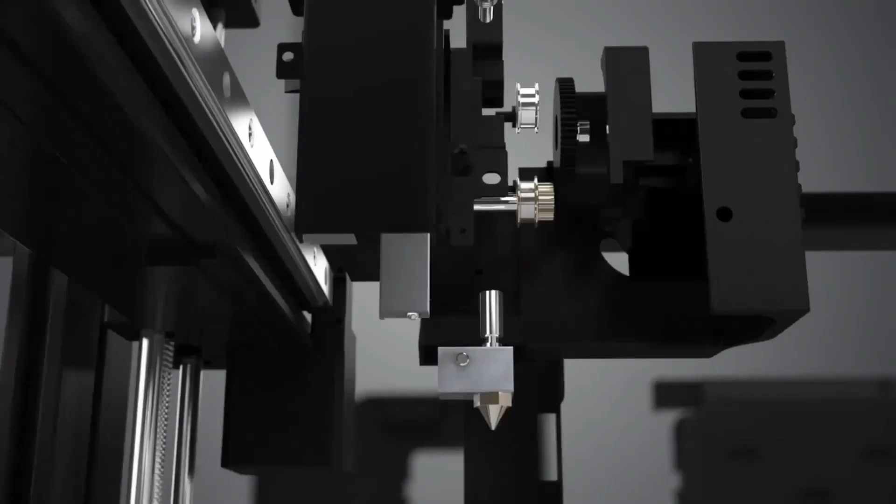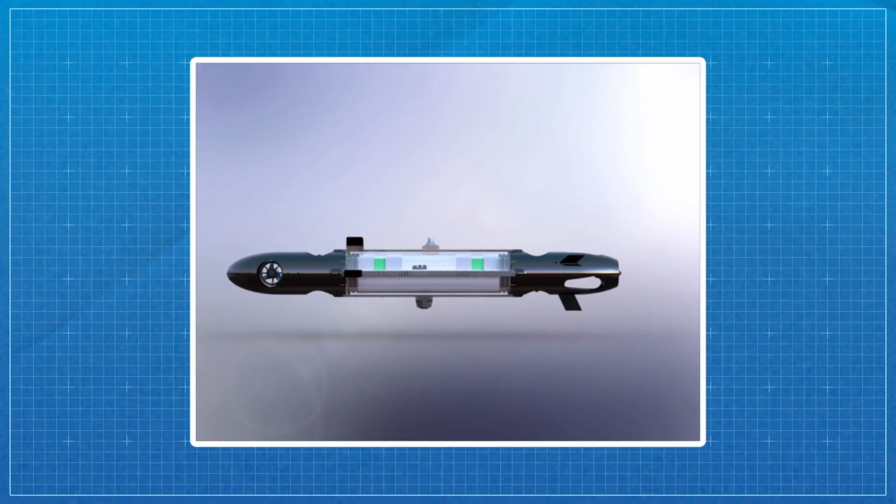Can you go ahead and just let me know what's up with Yonder Deep and what you've been up to? Yeah, sure. So, like I said, my name is Daniel. I'm the current president of Yonder Deep. We're currently a student organization at UC San Diego, also based out of Scripps Institute of Oceanography. We're working towards developing a 3D printed autonomous underwater vehicle, or AUV, primarily for oceanographic research.

And with this goal in mind, we're working in collaboration with a physical oceanographer, Grant Deane, at Scripps Institute of Oceanography, to develop our AUV for deployment in Svalbard, Norway this summer for climate change research, which is really exciting. We'll be collecting acoustic data, which directly tells us how fast a glacier is melting and ultimately translates into the rate of global warming. So that's been our project the past few years, and we recently partnered with Raise3D, and we're excited to work more with them.

We actually partnered with the oceanographer Grant Deane about 5 years ago, and we've been working on the same project for about 5 years. He's really been focused on climate change research. A big thing for him, with a background in glacier research, is that getting up close to the terminus of a glacier is really dangerous when you have 200-foot tall calving events happening. You obviously don't want to be underneath that. So for him, gathering acoustic data at that level is really important.

Getting that data requires an AUV, and that's transformed how the entire research community has been gathering this data. But the problem is these AUVs can range from tens of thousands of dollars to hundreds of thousands, even millions, depending on the capability. So we're really here to change that, make entry-level research more accessible. And that's where we are today.

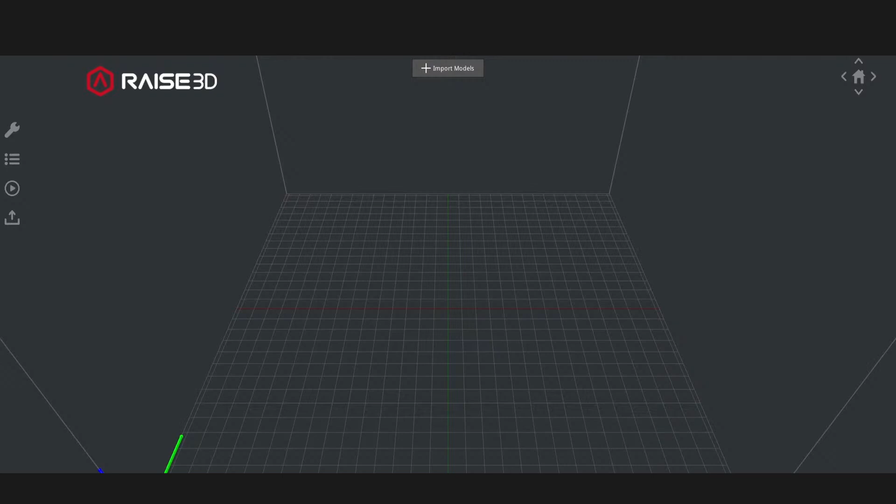Yeah, actually, I do have some of your parts here. Do you want to take a look at them in ideaMaker and go through what it would be like to print them for your guys' application? Sure. Sweet. Okay, cool. Which file do we want to bring in? I think the nose cone or the front motor end cap, either of those could be good. Okay, both excellent choices. I'm going to go with the front motor end cap. Be a little bit quicker.

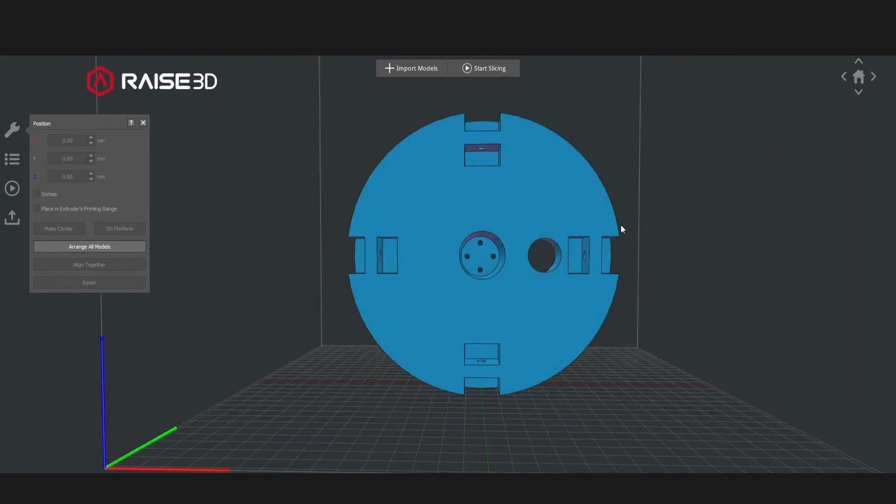Real quick, this just goes to show the type of parts we're working with, and CNC machining this out of a piece of aluminum would be really difficult. Yeah. And also be pretty heavy. So that's why I opted for 3D printing. But anyways, with something like this, we really just place it on the flat face you see here. Yep. On the left side here. Then go ahead and just lay flat, or the 90-degree rotation snap. Either one will work. We're basically running it like this.

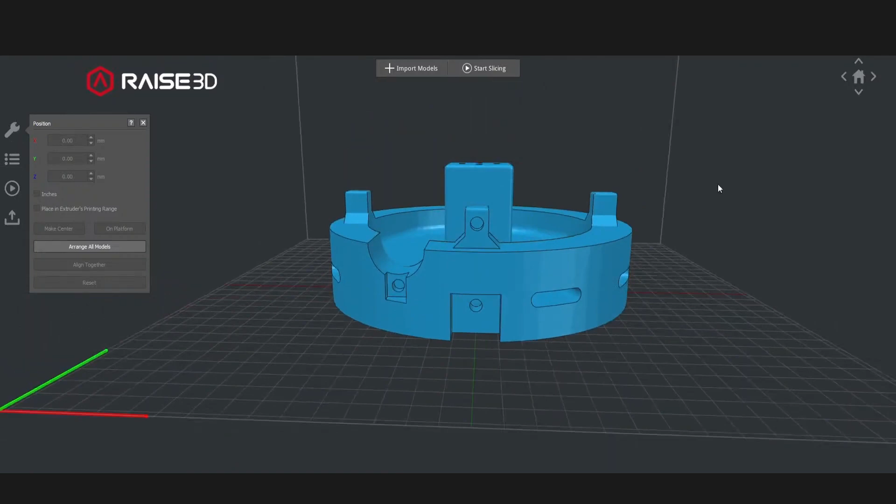Yeah, so I guess this part's relatively simple in its design. I think for our final version, we might put PVA into some of those little slots on the side. Those are for cable pass-throughs. Really, this part isn't too complicated, but this is a good example of one of the complex geometries we'd use that really wouldn't be possible without 3D printing. A lot of the things in here, like going around the outer end, could be CNC machinable, not too bad, but like we said, the weight considerations, and these cable pass-throughs.

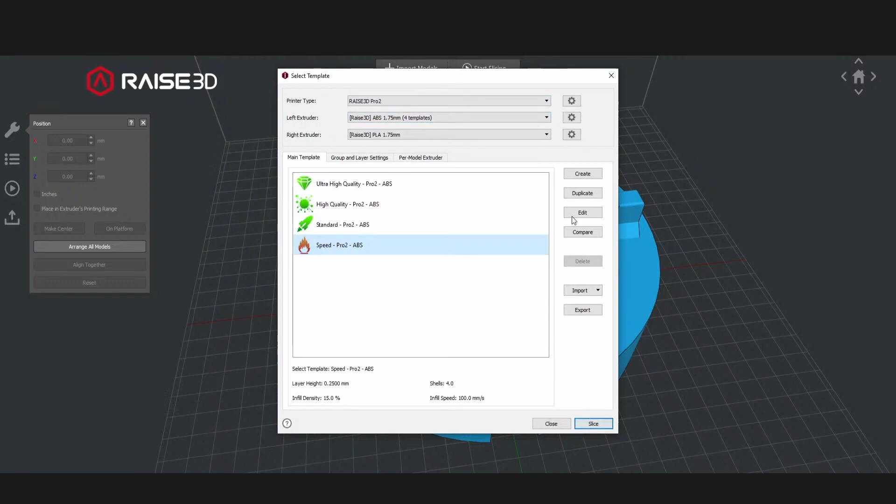I'm assuming this one isn't actually on the exterior of the vehicle, right? Is this internal? Yeah, most of this is internal. The slots feed from the outside, but it's mostly internal. So if it's mostly internal, if we were to do this out of aluminum, it'd still be pretty lightweight, but by printing it, we can get it down to, here, I'll just slice it really quick for ABS, just the part itself. If we're running it with our default settings, 15% grid infill, good for you? Yeah. All right, cool. And I'm leaving the supports off of this one specifically, just to get a read on the part material.

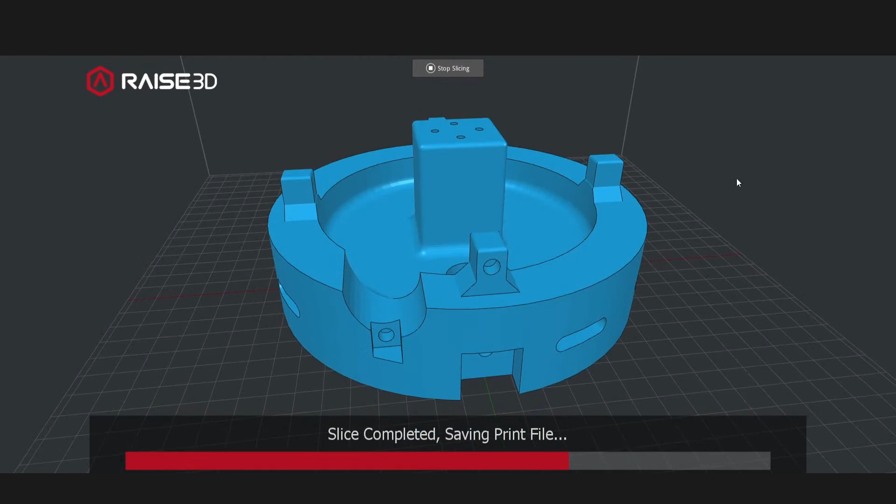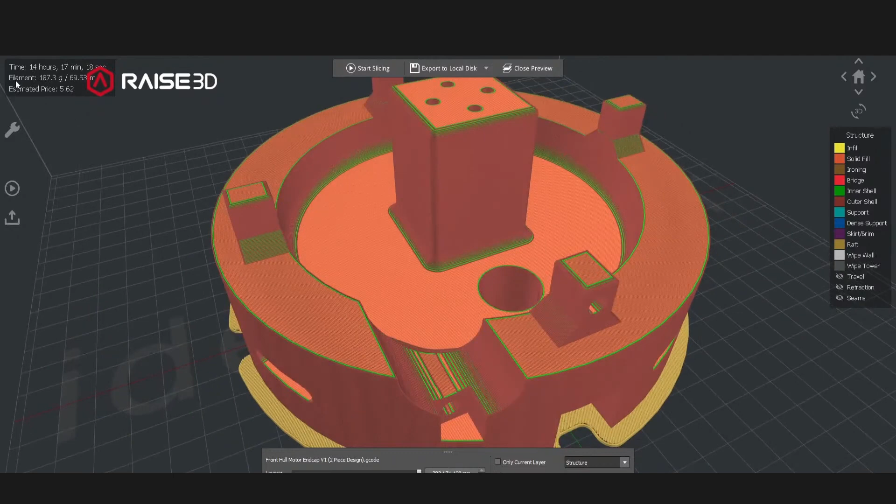So having the slicer give you estimates on things like that, I'm not needing to go through and look at what's the total volume of the part, what's the density of aluminum. It's basically part of the printing process to get that information. Okay, we're looking at 187 grams. And all of this would still be structurally sound enough for just holding those components, not taking any water pressure. Even if it was, that outer treatment just needs to keep that water out. The internal structure could still probably not be 100% density because we're compensating for the sealing of the parts with a different combination.

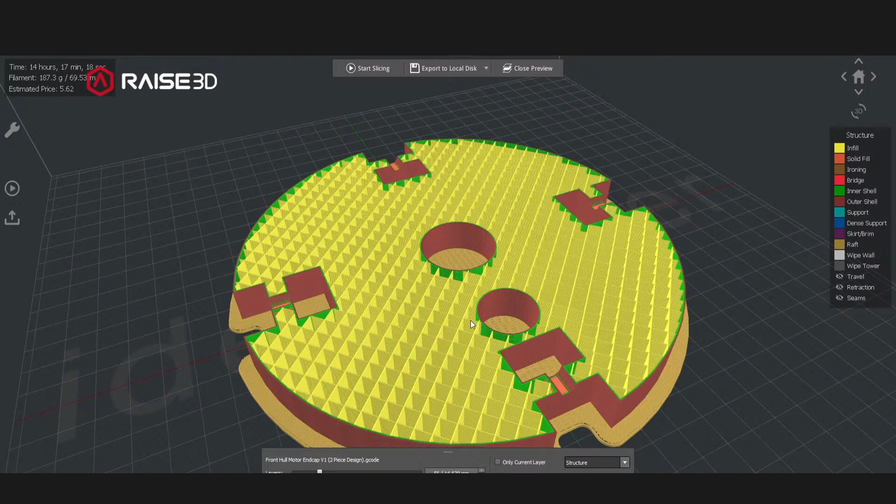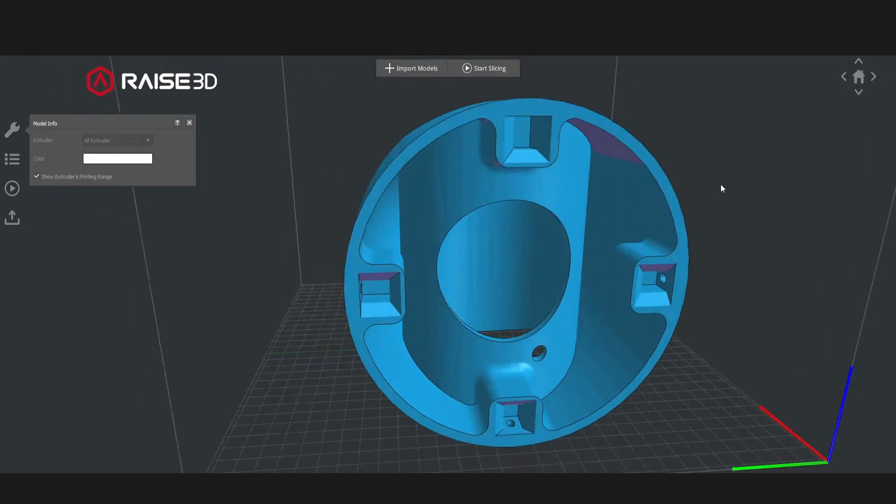And then I wanted to take a quick look at the nose cone. I might not reslice this one, but walk me through the purposes of this part and what you would be thinking about manufacturing by printing versus traditionally. Yeah, so this part is really difficult. I think it was meant to be 3D printed, like this big gap in here. So there we go. I've got the interior of it going through here, and it is all pretty much empty except for this section here that crosses through the middle.

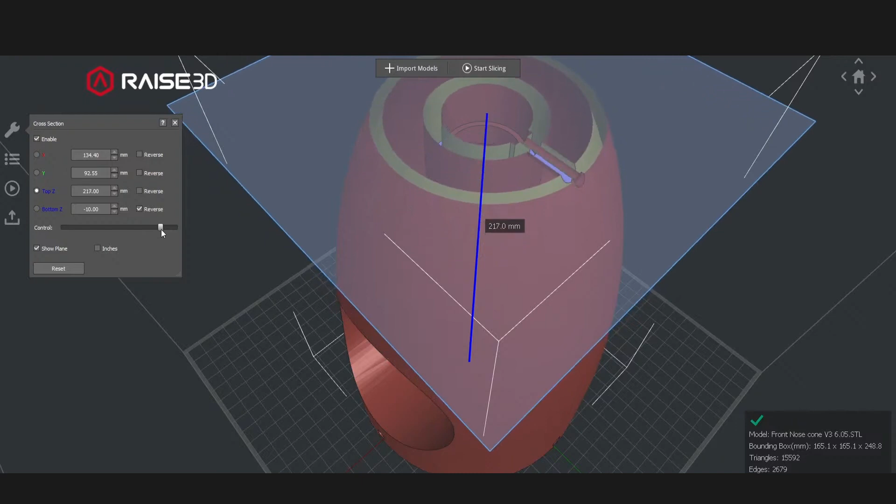So we might have to make this in multiple parts even if we wanted to have it machined. But the overall shape of it is more organic, I guess, in that sense. So I think that's another benefit of 3D printing. Even people in the industry do things like topology optimization, making things specifically for 3D printing that are organic. But this piece in particular, that big hole is for our left and right turning motor. So the piece that it's connected to is a little bit load bearing.

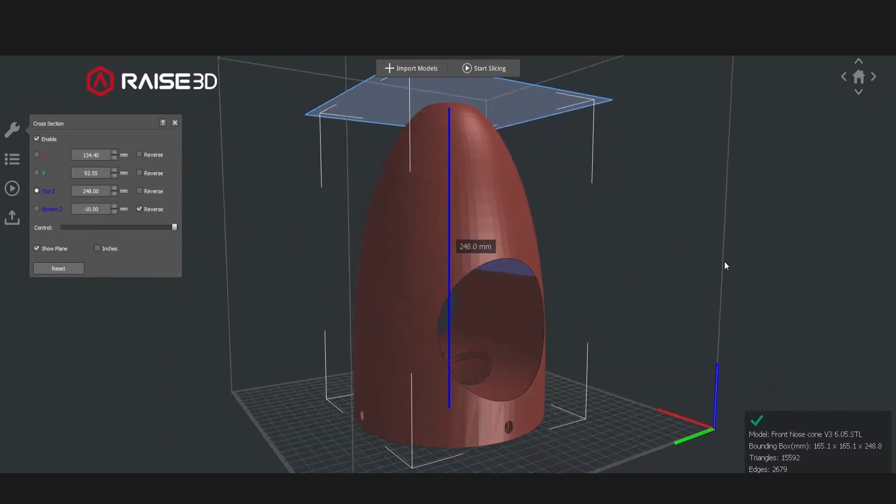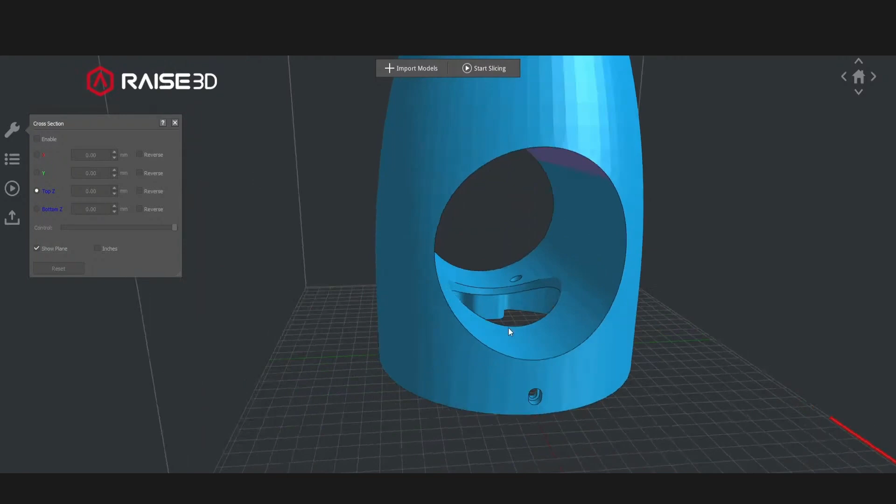Yeah, there's a lot of considerations, just like this piece at least for printing, like that bottom base. We usually print it in the configuration you have right now, and so that bottom piece usually needs PVA supports. Yeah. And then it usually ends up a pretty good finish. Yeah, down in here, I would imagine that using PVA for things like this, all of these bottom surface details, definitely want to use that.

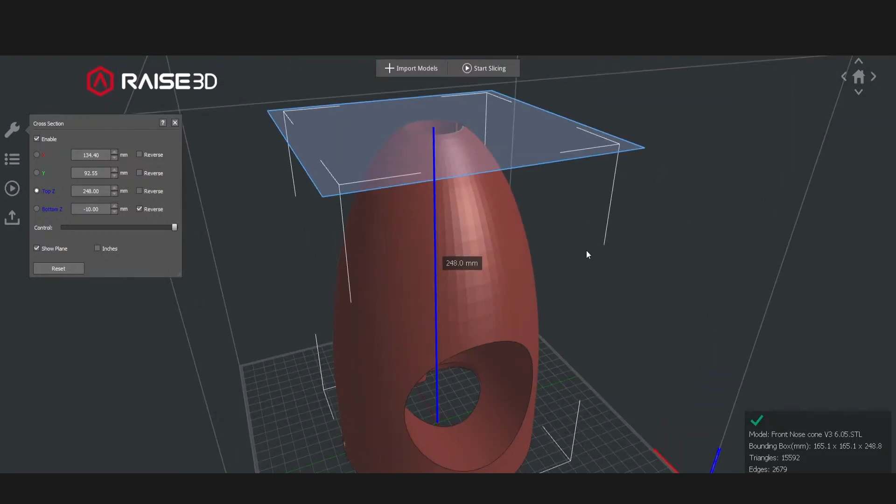Have you seen the modifier bodies on this yet? I have not. No? Okay, cool, awesome. I'm just really glad that I get to be the first one to show you. So really what I'm thinking of for this base, if we want to reduce material, print time, things like that for these parts, but still strengthen it in that area where it's going to be mounted, I can go ahead and we'll close our cross section.

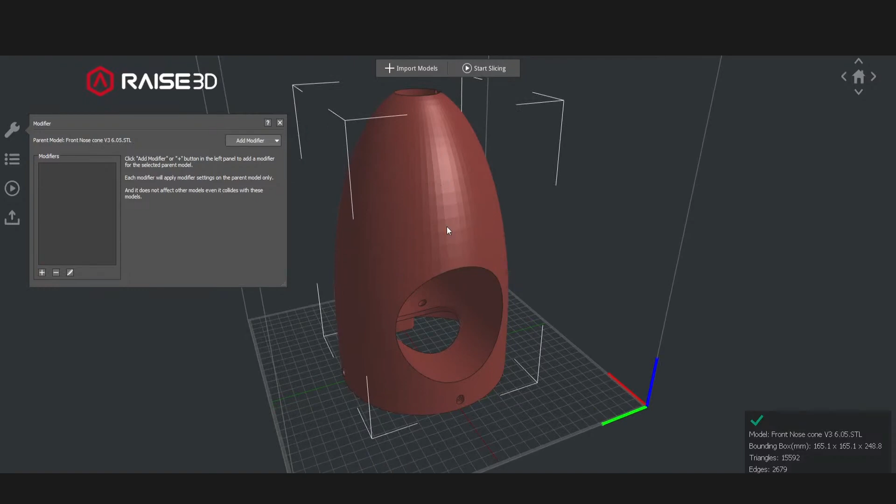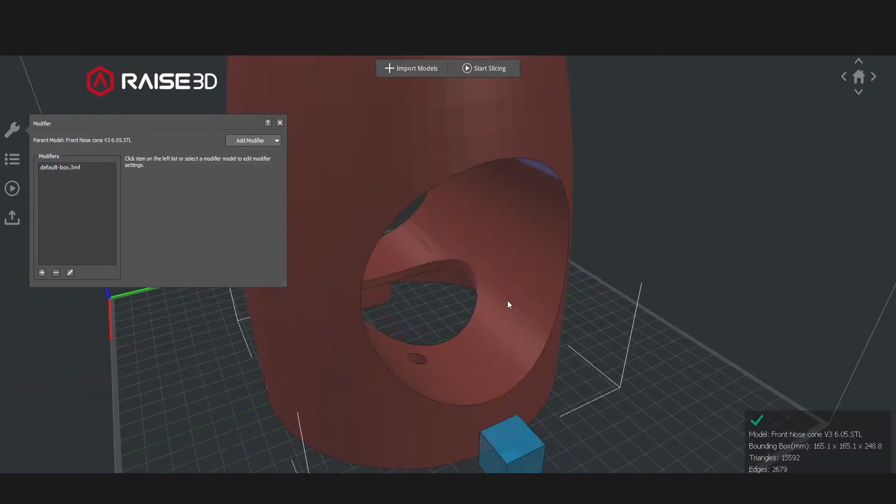And then modifiers. If I had this STL file, I would kind of want to import in maybe just a section of it because I can pull in a specific STL from local disk. But just for this one, the main point is I just selected this one, modifiers at the top, add in a modifier. Anywhere that this part body is overlapping with the modifier bounding box, it is going to change the parameters of the part, but only in that specific region.

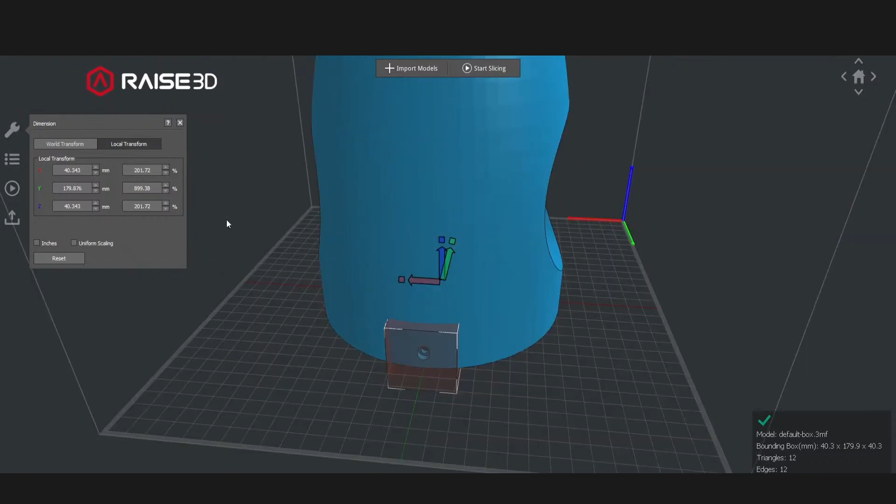So I'll go ahead and scale it up so it covers a bit more of the base. We'll put it in the center, change our scaling a little more so we cover the entire bottom area. So I have a modifier overlapping the region where I want. We can set it to change the overlapping settings of the parent model.

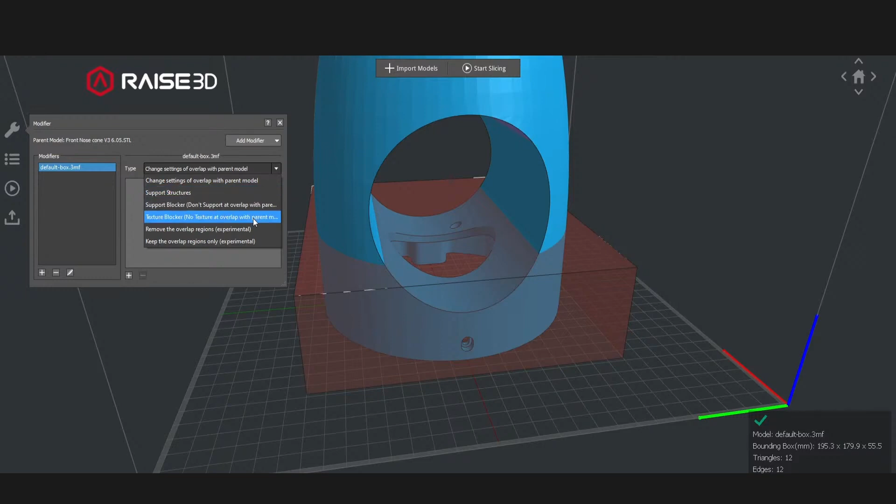We can also run it as support structure if we wanted to have a really specific support orientation or design, or support blockers. If I wanted to not have supports on this arch, I could put a modifier through that region. As long as those surfaces are within that bounding area, it will not generate supports for those areas, but it can hit everything else. But just for this one, we'll do change overlapping settings.

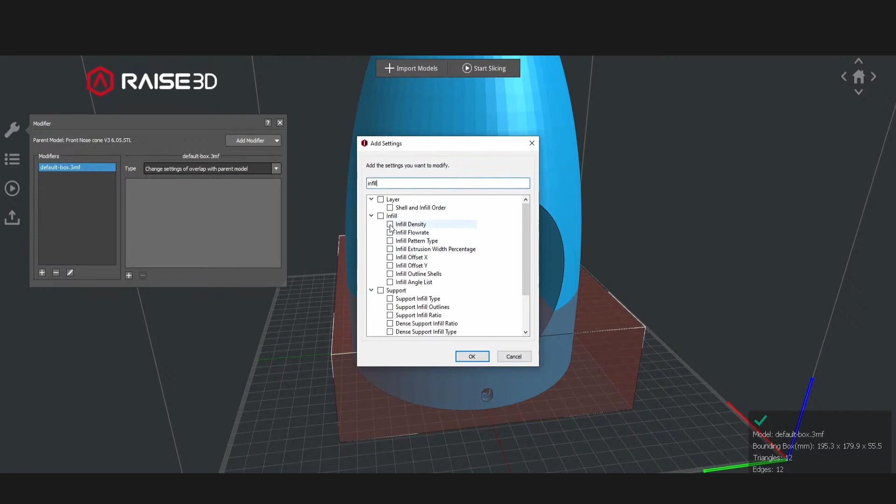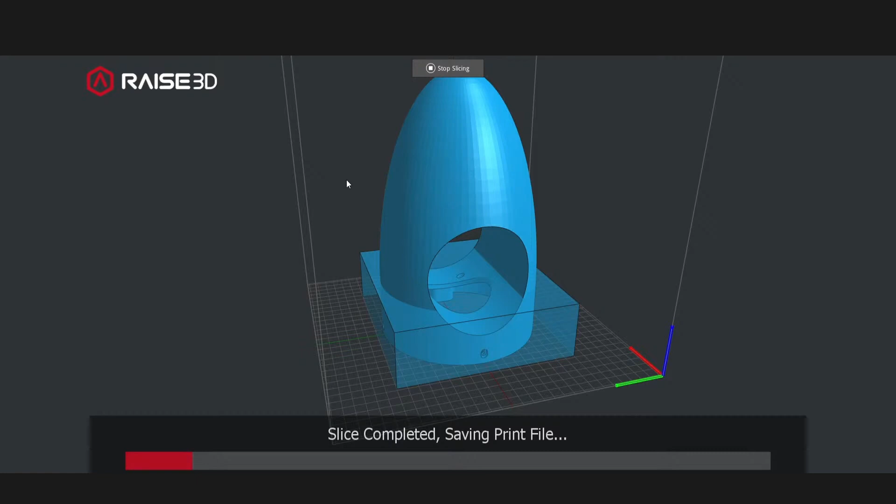I'm assuming also with the modifier, you can also change things like variable layer height, things like that. We can change certain areas. Usually, I believe the layer height has to go for the entire layer. That one's a little tricky. It is possible to assign certain sections to the left and right extruders and have each nozzle running a different layer height. That's a little bit easier.

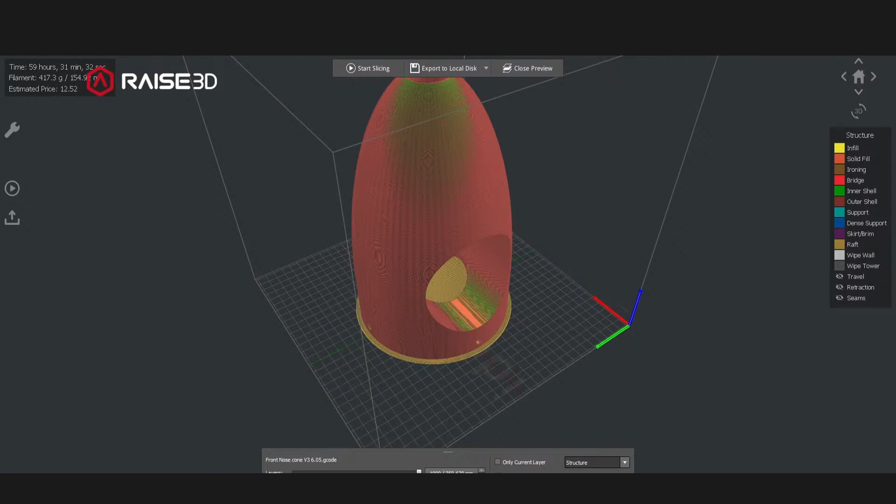Or doing like a combined infill. That's something that we can do. We're printing the outer shells in a lower layer height for the extra smoothness or better surface quality. So printing the outer shell at a 0.2 off of one nozzle and then printing with a 0.8 on the right. And then we could run the infill at a 0.6 and that just cuts down on the print time and total amount of infill layers.

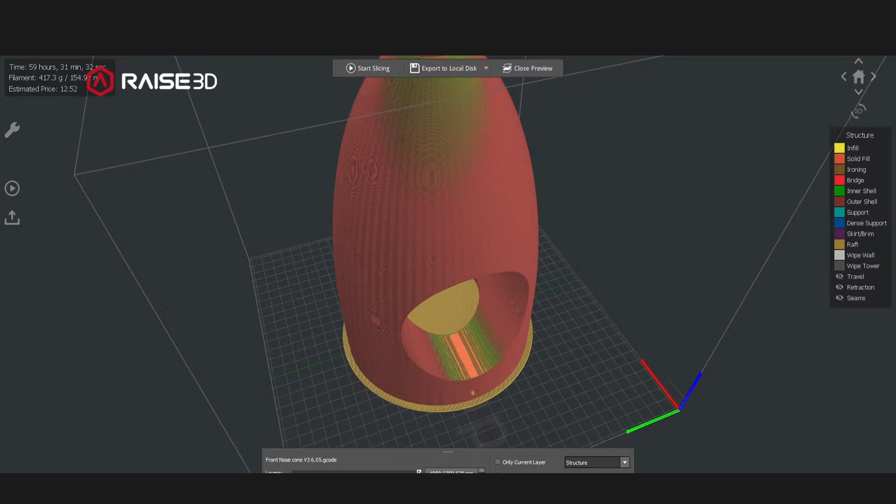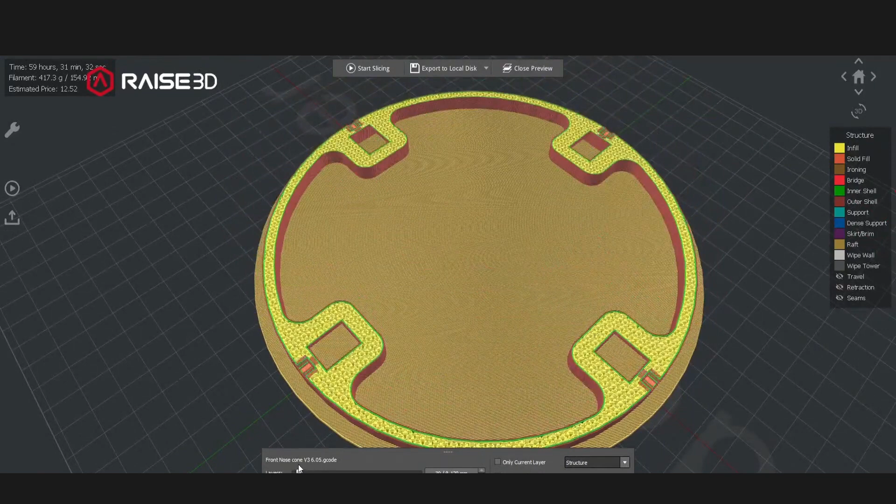But for this one, what I want to get into, a lot of this is the structure. Yeah, really useful. Yeah, it is. It's really, really useful. I gotta say, it's one of my favorite features. So then getting down in here, all of this is running that higher density. We'll have more strength in areas for the mounting, but the rest of it beyond that point goes down to 15%, basically just used for the rest of the body.

And then I think we're basically just gonna have more things going on. You have your machine. We're going to bring it down to you pretty soon, and then we'll be doing a lot more, just catching up and being a part of the process and the project. So we'll keep everyone else updated in future streams, future videos for sure. And yeah, we'll be seeing a lot more of Daniel.

But anything else you want to wrap up on? Not much. Just really excited to work more with Raise3D. So far it's been really supportive in our project, and our missions align pretty well. So yeah, looking forward to working with you all more.